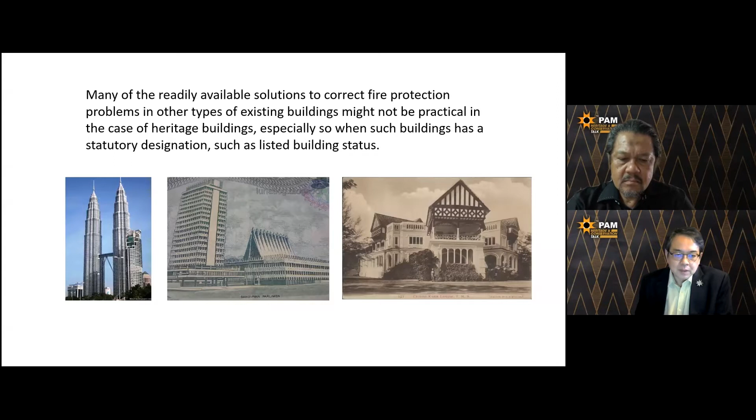As you are aware, as a heritage person who works in heritage buildings, you need to protect the integrity of the building, the originality of the building as to what it was at the time, as far as your documentation allows you to keep it or conserve it to that particular time. So by doing that, you are also preserving the materials of the building.

A lot of these buildings were constructed without codes at that time - very little, none at all, building codes, no consideration for fire safety at that time. In fact, Kuala Lumpur was wiped out, I think in the 1800s, at one time by fire, because buildings were very closely built and they were all timber. So that kind of hazard still prevails today, which I will show you in a while.

So the Gedung is primarily of brick wall, brick pier, and also timber trusses and all that, so it has a high potential for fire. So with the provision of hose reels, and again by having those active and passive systems - but what happened, will the building be burned?

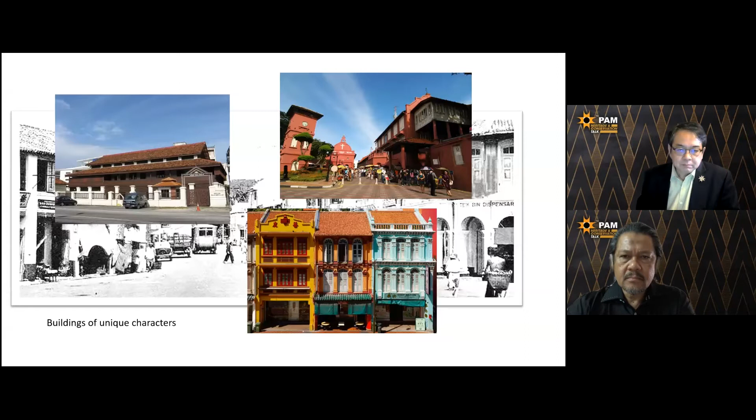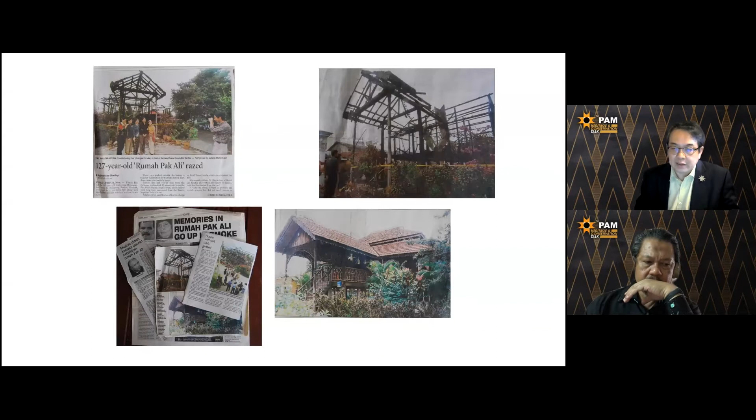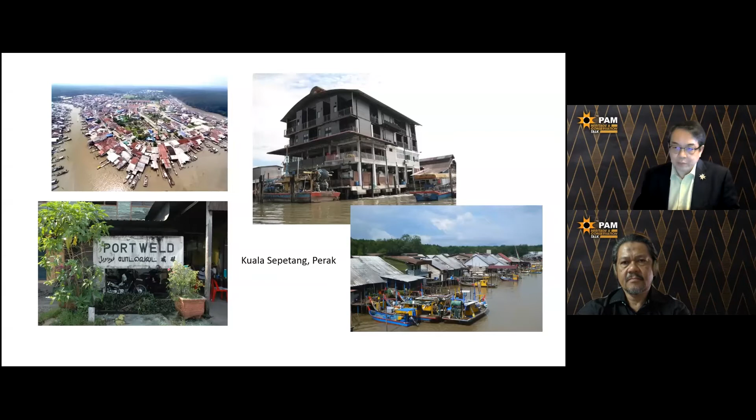So again, the question is, although you have provisions for this, who is going to fight the fire? Because you wait for the firemen to come and run along the small narrow lane, and you don't know where the fire is first. You need somebody to lead them to you.

The people, are they trained to use it? How to fight the fire? Do you contain the fire, or just pour water into it? Does it help? So technical know-how to fight fire must be taught to these people who stay there, and the crucial people. You must have an organization chart of who to call, who does what. So at least if there's any emergency fire, the right people will be able to fight it properly.

So if not, in 10 or 15 minutes, everything will be gone. If you're lucky, there's no life loss, but the whole village is gone, and there is no longer a village soon - diminished. So this traditional living style will also vanish in due time.

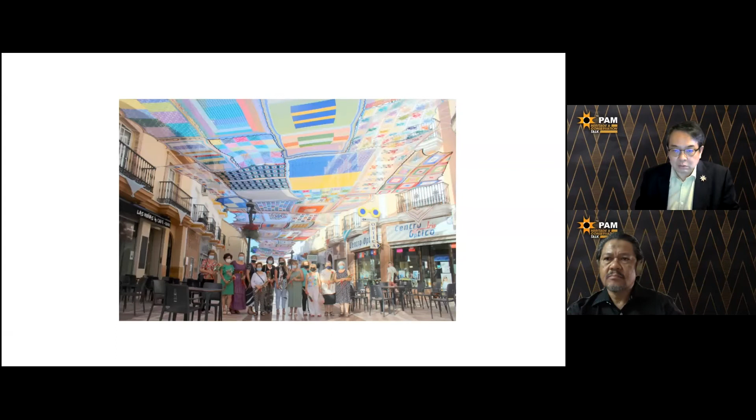But can you imagine doing this in one of the streets now I've shown you, with flames flying all over? The fabric is here, there, and all these highly combustible materials flying around. A lot of this decoration is temporary material, which is also very combustible and easily ignites.

So how are we going to address this thing? You want to show off that these are traditional, all good, but how do you contain the fire risk there? You have to consider all these things, what can burn and all this. So as a designer or developer of this area, you have to consider how to contain these things.

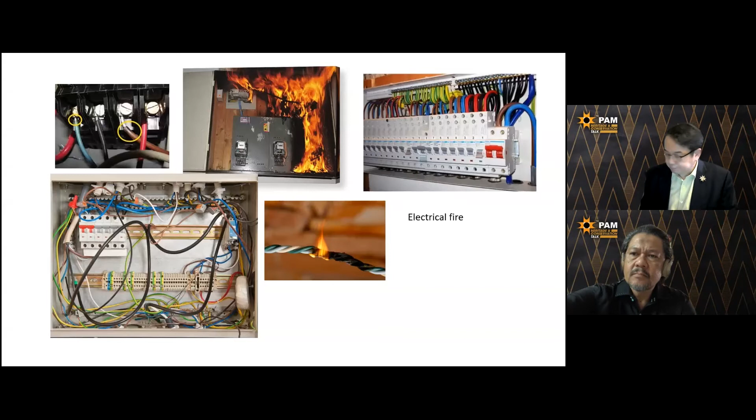So here again, people connecting things here and there, they just arbitrarily connect things. A lot of times they do not know. They just get a wireman to come in and do the connection, and sometimes they don't do a good connection. They use improper connections of bare wires and just use PVC tape to tape around it, thinking that it's good. But it's only as good as...

We don't know when the thing can trigger, the connection come loose and cause friction and sparks, and then heat build up because of this loose connection. So again, these are all hazards. You need to employ a competent electrician to do it, and also make sure that all your appliances are balanced. Now, most of the pictures I showed you are triggered off, more or less, electrical.

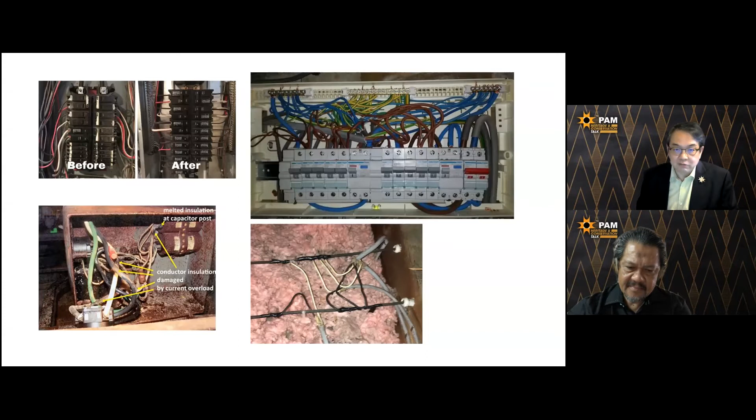So 1/3 of all accidental fires in restaurants are due to faulty electrical wiring and equipment or improper use of equipment. This is only for restaurants. What about residential and other heritage buildings? We need to take note of these things.

Even nowadays, I see that some of the big developments also allow 6 meters wide, but they forgot that they have super high buildings. So again, we have this problem.

And then when you start to use it, the owners or the person who runs it will then put heavy pots of plants and this and that, and it sort of blocks off the access to this emergency vehicle. And don't forget, every second counts. So you just block them off while the fire is ongoing. Every second you block them, the thing will just get worse.

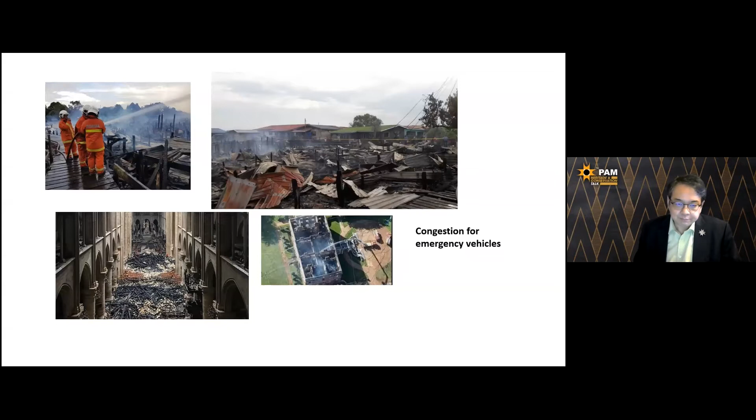Okay, this is a very famous fire, an icon in Paris, Notre Dame Cathedral, which was burned. The whole roof was gone, and now left the shell. And I think they have gone for a redesign competition, and they're going to redo it because it's so iconic. But the whole thing is that this building, the originality has now gone.

Only what you have is photograph. So this was apparently where the fire came from. I'm not sure, maybe Mr. Tay has the latest on this report. Mine was just after the fire that came out.

This is, you see, the person must be a competent person looking after it. Even if you have one of the best systems of firefighting or alarm, it's useless if the person is not competent to use it or know about the system.

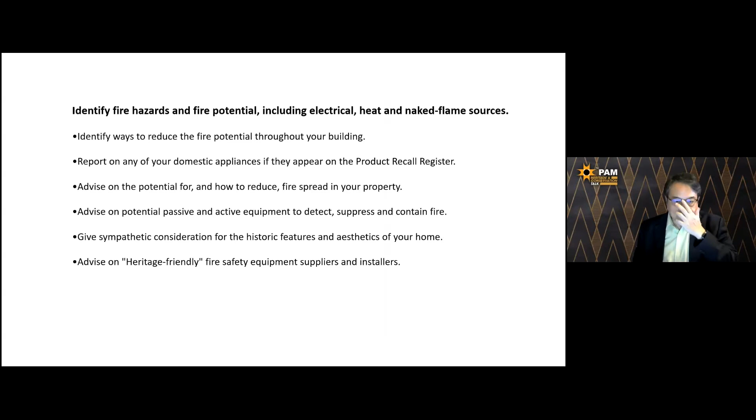That is sometimes not a good thing to do. So you identify the fire hazard and fire potential, including electrical, heat, naked flame source. So these are the few things you need to consider. Just very quickly, point, report on any of your domestic appliances that appear on the product recall.

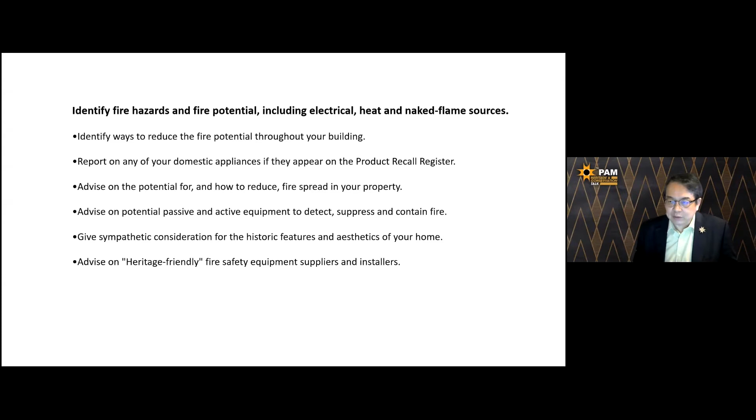So people must be there for management to make sure all these things are proper - the fire extinguishers are properly charged or recharged all the time, and making sure they're not expired. So advice on the escape plans in event of fire, how to escape, what to escape, make sure the passages are all clear. I've been to some places and I see that they end up as partial storage for these escape routes, staircases, corridors, and all that. So again, that poses a big danger on these things.

So let's go into the fire safety guidelines for heritage buildings. It was supposed to be launched in 2020 but because of MCO again, we had to postpone it. Hopefully by the end of this year we can get it moving again.

So the guidelines are divided into 5 parts. First is jurisdiction, law, and regulation for heritage building. Part 2 is classification, purpose group, and category of building. Part 3 is approaches in dealing with adaptive reuse of heritage building. Part 4 is fire safety and prevention. And part 5 is management and prevention.

So how does it go about now? These are the sources of power that we use for our guidelines. We have to follow this law, we cannot change it. So these are some examples.

Law of Malaysia, the Arahan, and the UBBL, and the National Heritage Act - these are the sources of power that we have to observe. We also have the federal government gazette on electrical under the EC, so we must follow that also.

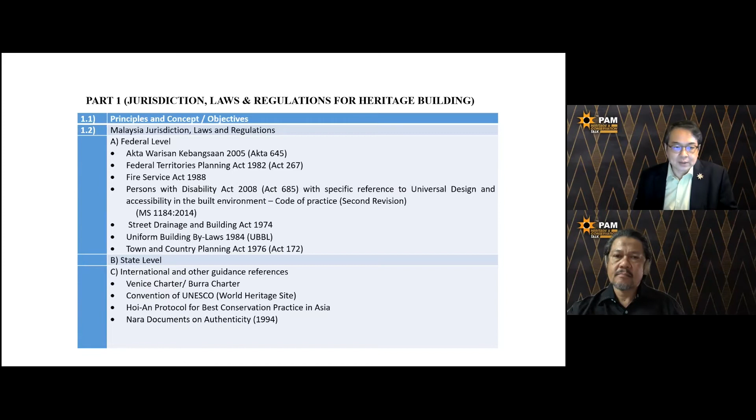So the main objectives of this fire safety and heritage guideline are: life safety first, to give sufficient time for occupants to get to safety; minimize damage or loss caused by fire; and if possible, preserve the original quality of the heritage building. That is the main purpose of this document.

So in the bylaw, we are looking at part 2, submission of plans for approval. In the end, I will show you why we need that. Then part 7 is fire requirement, and part 8 is fire alarm, fire detection, and all those things.

So in part 2, classification, purpose group, category - but this category purpose group is not necessarily in the uniform building bylaw schedule for this purpose group of building. No. So we have 2.2, we have this building appraisal of the material that is existing, and then purpose group.

Architect Stephen, sorry to interrupt. Yeah, we have 5 more minutes. Oh okay, thank you. Okay, alright, thanks, go ahead.

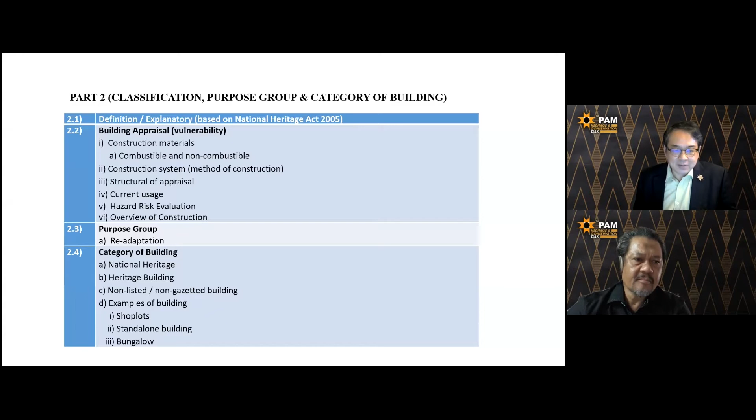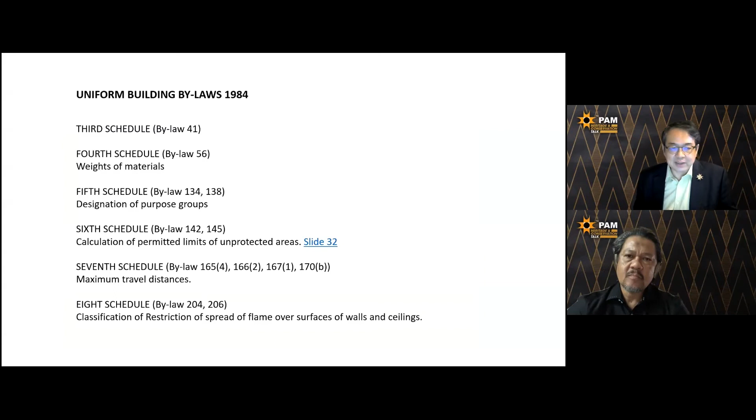Yeah, 2.4 is category of building, right? So the uniform bylaw third schedule also talks about that, and the fourth schedule, fifth schedule designation, and then sixth schedule calculation permitted - all these have to be observed. So you cannot just introduce a staircase somewhere in the old building just to satisfy UBBL. But then in UNESCO areas, sometimes this doesn't work - you introduce a staircase, then your building is already in breach of UNESCO requirements.

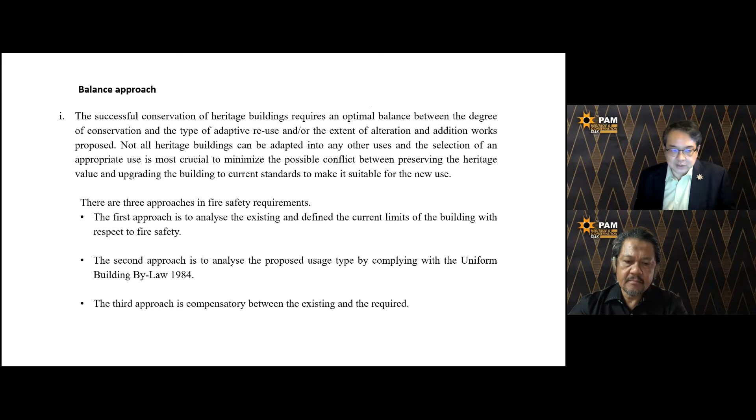So something short of a performance approach in a way. So all the things that are needed - a balanced approach. Successful conservation of a heritage building requires an optimal balance between the degree of conservation and type of adaptive reuse, and the extent of alteration and additional works proposed. Okay, then principle of accepting alternative design.

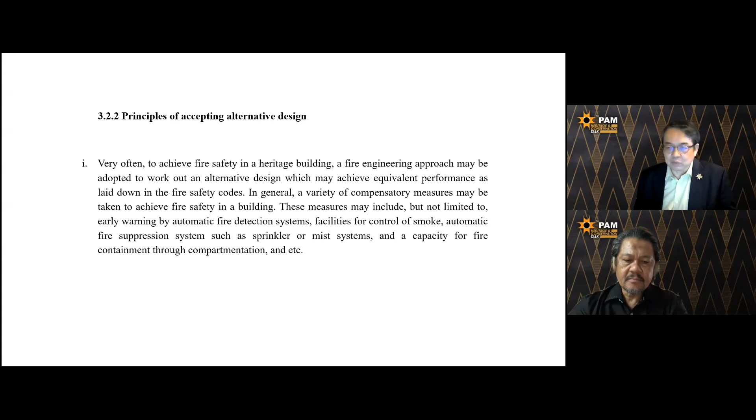Very often to achieve fire safety, a fire engineering approach may be adopted to work on alternative design. Mr. Tay will go into that much more in detail. Just that here I just tell you that we need to look into that.

So part 4 is fire safety and prevention. We have passive systems, and also performance-based, and also we are looking at an active system to help out also. So this one is more technical, and uniform bylaw again. So we have seen some very elaborate systems in Japan, but these are too expensive for us.

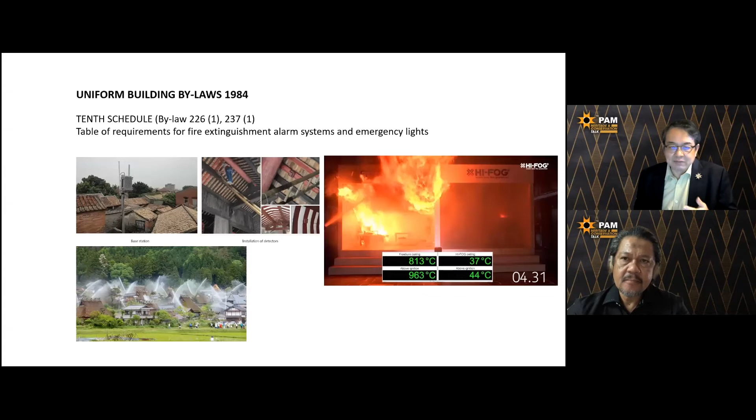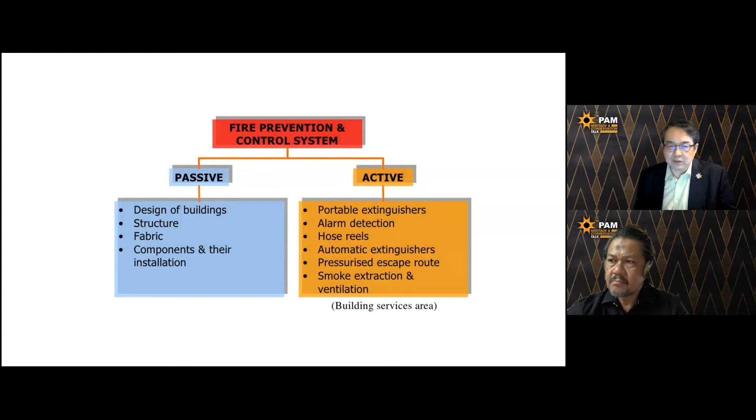So that we need to look at other places. Fire and all that, Mr. Tay will talk about it. So fire control system - the passive, active, design of building, portable extinguishers. So most of you are aware of the passive and active. So we use them a lot.

So the final part is the management operation. This is very important because this is after you have delivered the building, it is in use. This is where it's important to make sure the guidelines are being observed, and everything is just like the fire certificate in the newer buildings now, high rise and all that. So we also want to introduce this, so all those people comply.

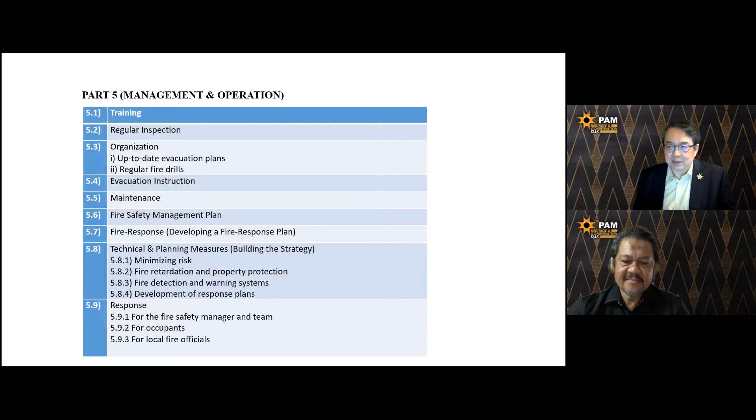So it's a license every year. There is an inspection every 2 years. That is still being considered by the committee on these things, so that the things are all in place. These are all checklists, daily checks, but these are all still in deliberation. Some may find that the daily check is a bit too tedious.

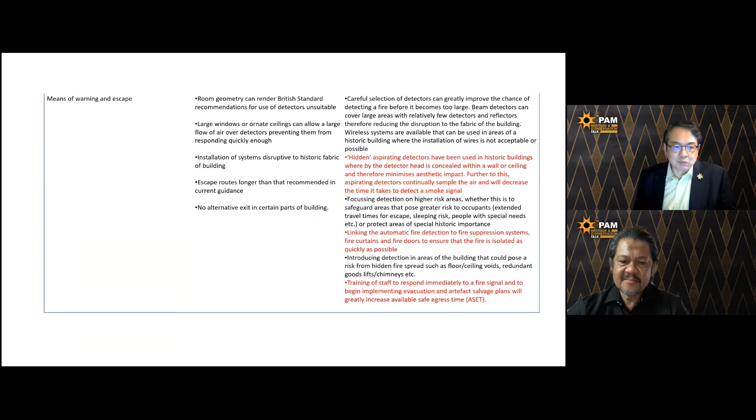So the organization chart - all these are checklists, simple samples, means of warning and escape, all those signages - all these have to be proper. So if you want to make sure that there is a follow-up, and not that the building after 3 years has nothing left, all changed, other users and all that.

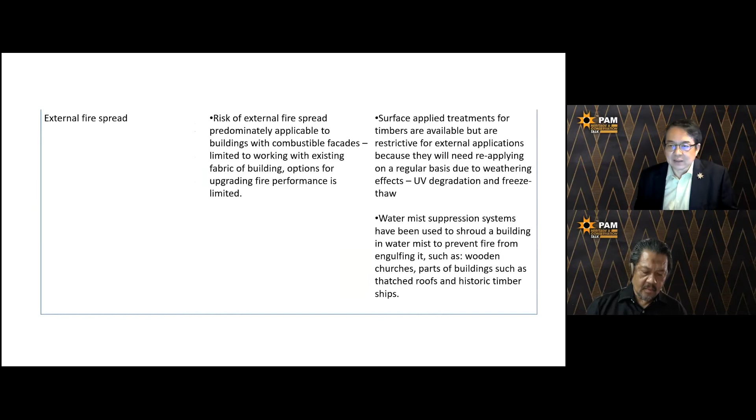So external fire spread - risk of external fire spread predominantly. So water mist, Mr. Tay will talk again on those things, pushing a lot of this. These are all fire protection, firefighting purposes. So access facility for fire brigade - make sure that they can reach, and how fast they can reach the place. Don't hinder them.

Okay, key points incorporated with fire safety management plans - measures identified during the prevention step are regularly revisited. That's what I was saying, to prevent fires from developing. Maintenance schedule to ensure protective measures put in place are still capable of performing as intended. These are all common sense things, but only common sense things, yet need to be followed up. Otherwise it becomes uncommon sense already.

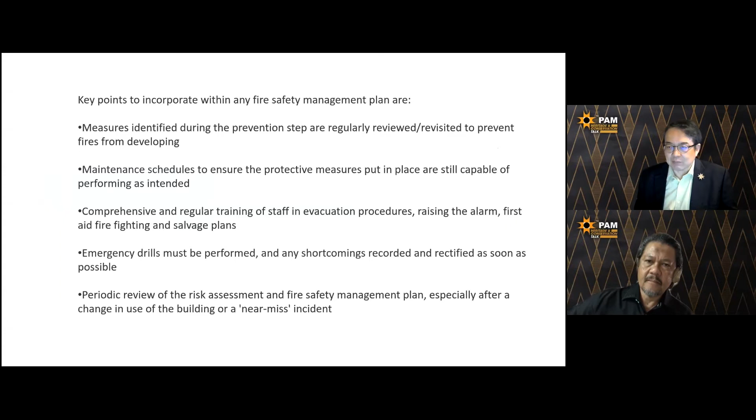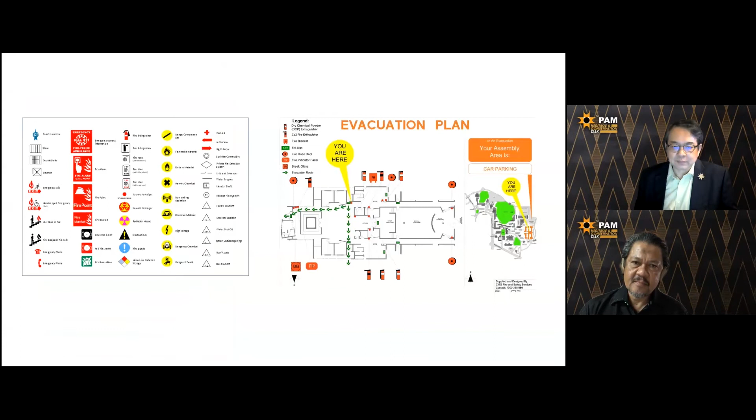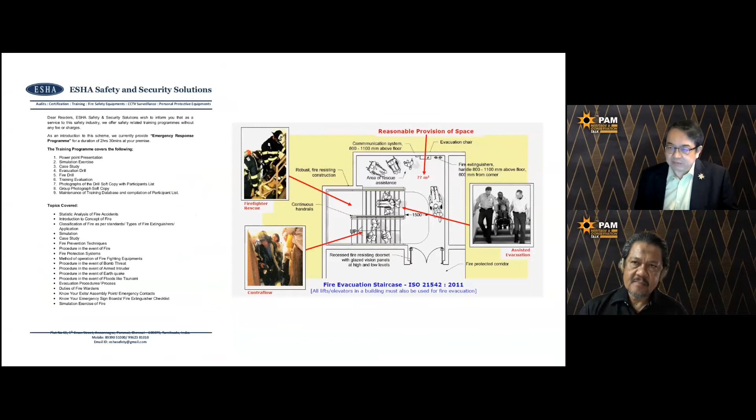So lastly, this word: stop erasing our history with fire. And with that, I say thank you very much. Back to you, Dato.

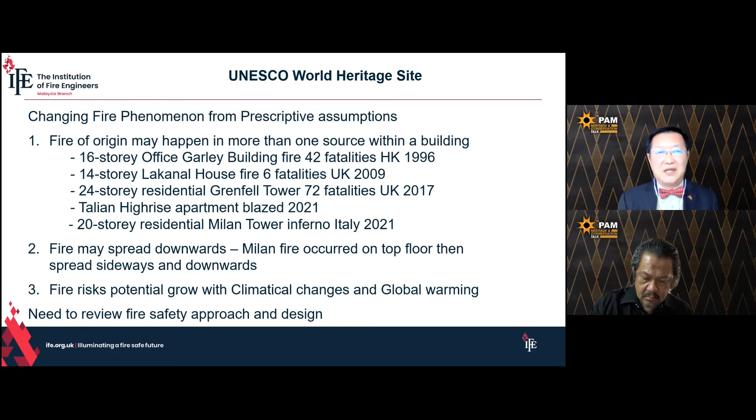Now, the other factor that increases fire risk is potential climate change and global warming. The scientists are now fighting tooth and nail with industrialists trying to cap the world's crust temperature increase within 2 degrees C, failing which will be catastrophic for mankind. So as the ambient temperature rises, we need to review the safety approach and design, because the likelihood of a fire has gone up multiple fold.

Grenfell Tower taught us so many lessons, especially as we have just entered the 20th anniversary of the 9/11 disaster, the Twin Towers of New York. And I can tell you, architects and engineers will definitely need to look at all these international fire incidents, and hopefully we can learn much more to apply to our current design, so that at least we improve the fire safety of buildings.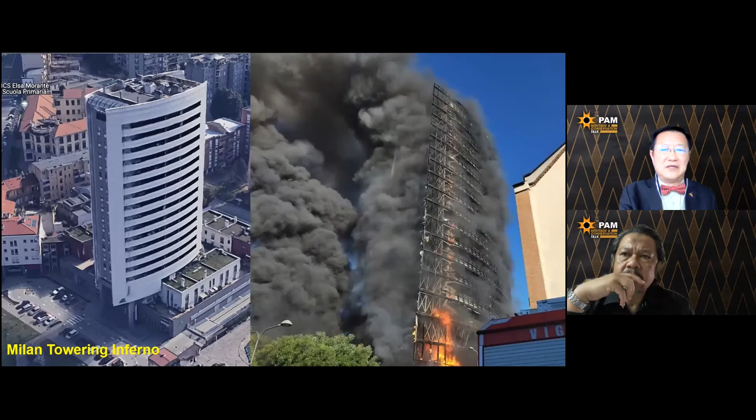This is a Milano fire, 20-story, and you can see it's a beautiful building, and yet when it starts to burn, it's scary. This is again an external cladding fire, and you can see that the cladding is all consumed. The interesting part is that the fire happened actually on the top floor, spread across and then downwards. This is never seen before. I've never seen any fire of this nature, and this actually opens up a new chapter whereby we've got to start looking at fire propagation fundamentals and principles.

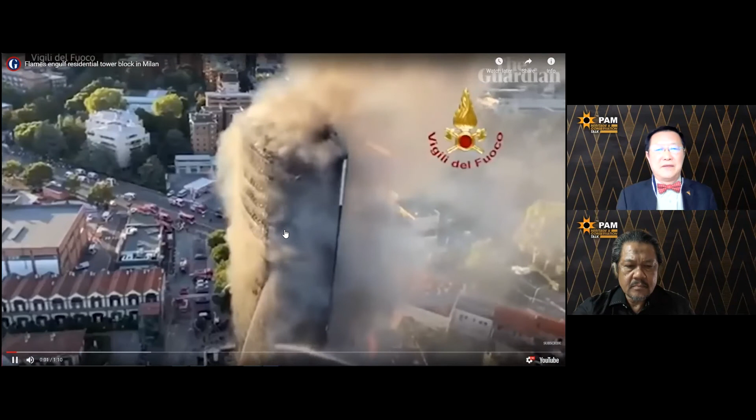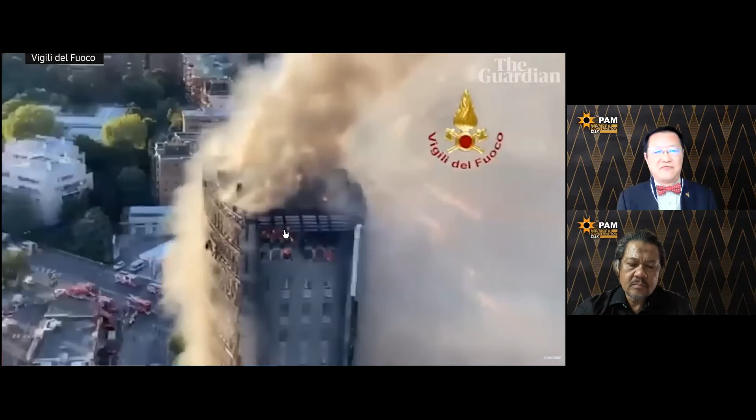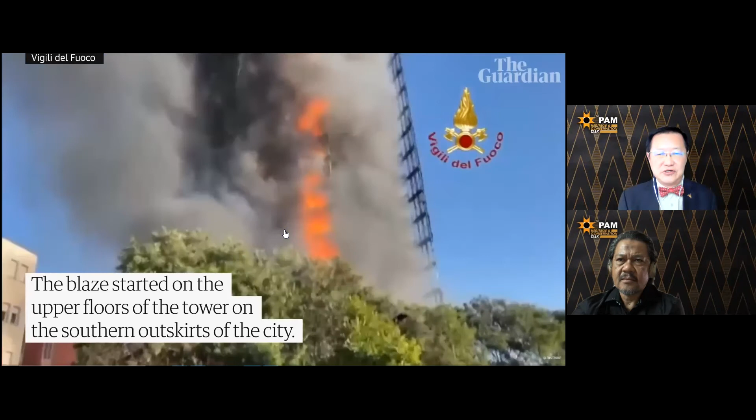It's a video of the Milano fire. Look at the fall off from the tower. Looks like a war zone. And this is the danger of a multi-story building fire, because all these are like missiles - they can kill, they can damage, they can spread fire onto the next building.

So with a fire, we are not only looking at the building on fire, but also what is the impact on the surrounding areas. If you look at the 9/11 incident, there are not less than 7 buildings that were totally damaged around it.

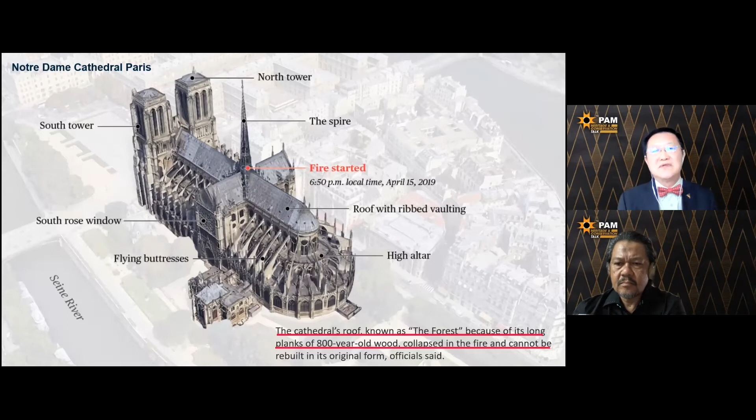The fire started actually during a renovation exercise, on the roof, just in the middle of the spire. Look at the timing, it started at 6:50. You can see the timing is very, very fast for the fire to spread. This roof, lengthwise, is about 330 feet. Fire spread because inside is hollow, and the whole roof is made of wood, so the fire spread up very, very fast.

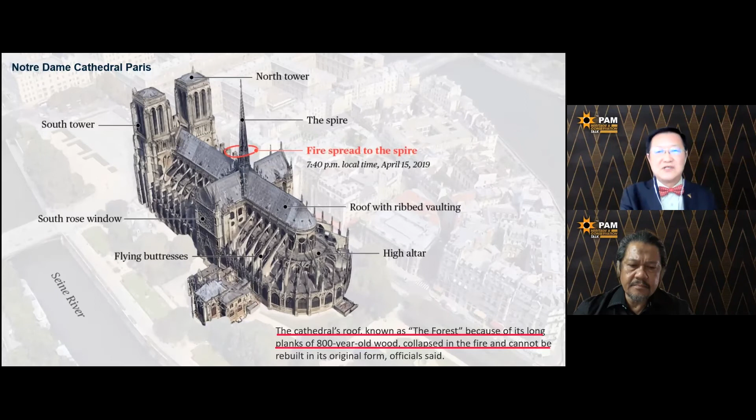7:53, the spire collapsed. The roof also collapsed at 8:07. So from about 7 o'clock to 8 o'clock, it only took 1 hour to consume the entire roof, a few hundred years old, made fully of timber.

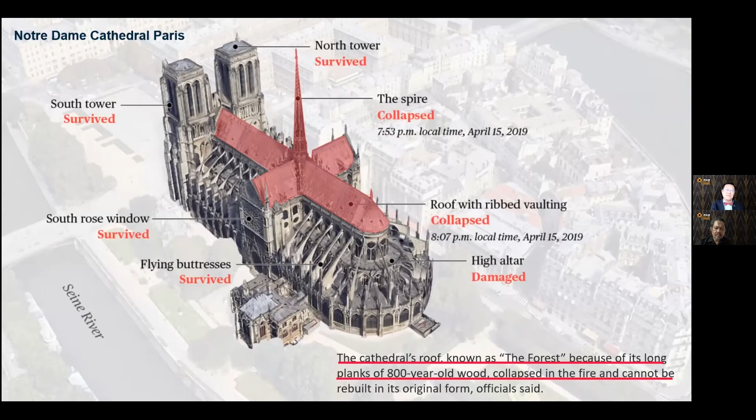It's actually beautiful, and it's going to take a lot of money to actually build a replica of the roof.

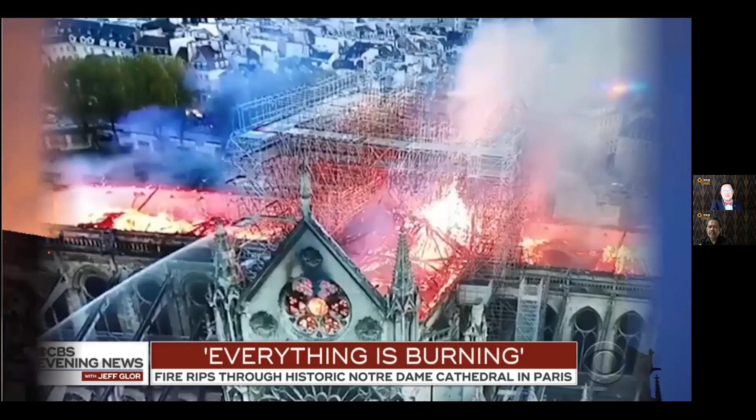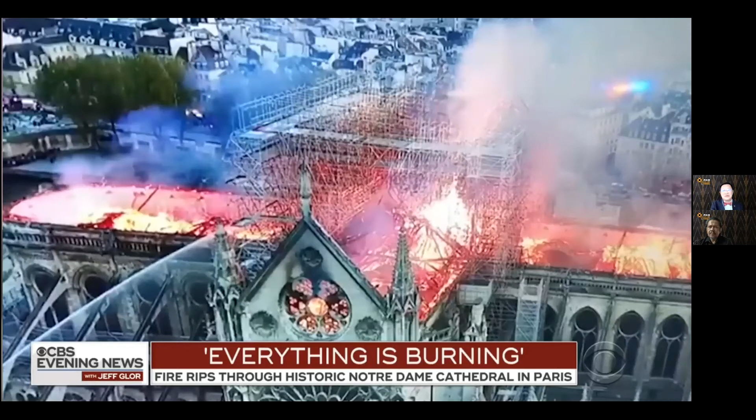I'll just show you how the fire starts. The spire is already gone, collapsed. The roof also collapsed. Luckily, the majority of the cathedral is made of stone, and so it actually withstood the ferocity of the fire, except the roof.

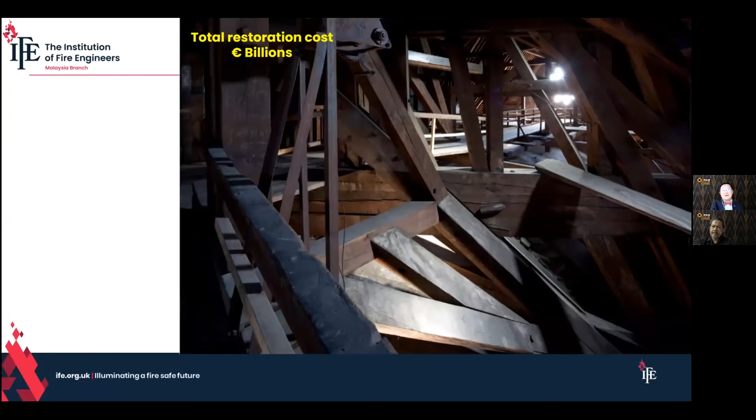And they call this forest, the roof. The French used to call it a forest because it's made of 800 years old timber. The entire roof is made of timber beams, structures, truss, and all that. And yet, they're all gone now.

Now, can you replace it? Of course, the answer is no. It's because how can you go and look for an 800-year-old tree to come and build the roof? And the craftsmen are also gone. Do you know how much it takes to actually refurbish it?

Next, let's look at how effective firefighting was. When the fire authorities were called, they came with their turntable ladder, because the roof is at a height from the ground level. So a jet was actually used to introduce water into the roof, while another one is actually trying to cool off the surface of the building below.

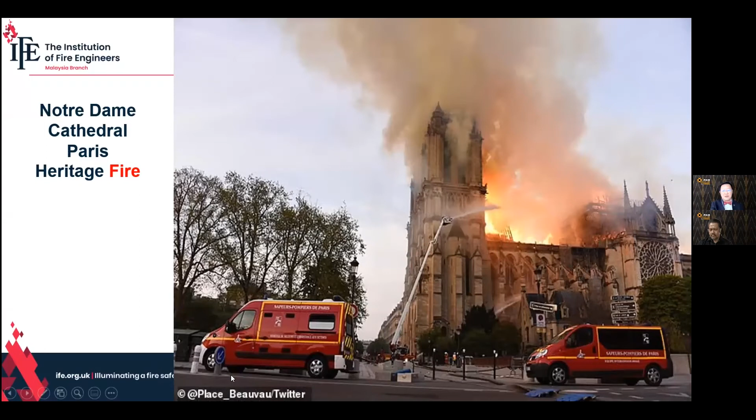Now, if all of us always assume that when you have a jet, you can actually put out the fire, is that true? Look at the photo. Because of the wind shear factor, most of the water was blown away.

I just read the latest computer simulation of 6 different types of water jet that come out of a nozzle. They tell you that 30% actually evaporated because of the hot air plume, the convection current coming out of the fire. Another probably 20-25% will fall to the ground because the water droplet size coming out of the water hose is actually quite coarse, about 1 to 2 millimeter diameter. And because there's gravity, as they travel through the distance, they fall to the ground. So very little actually reaches the source of the fire, provided your pressure and flow rate is actually correct.

This is another close-up shot, and you can see that the water never reached the fire source. So we should not fall into the pretense that as long as we provide the active fire protection system, it's going to help, because there are a lot of factors never factored in during the design stage. We need a lot more research, with the data presented, to actually formulate proper fire safety design.

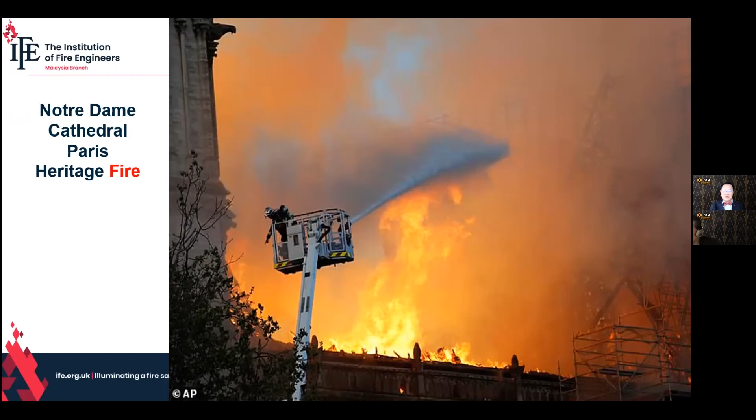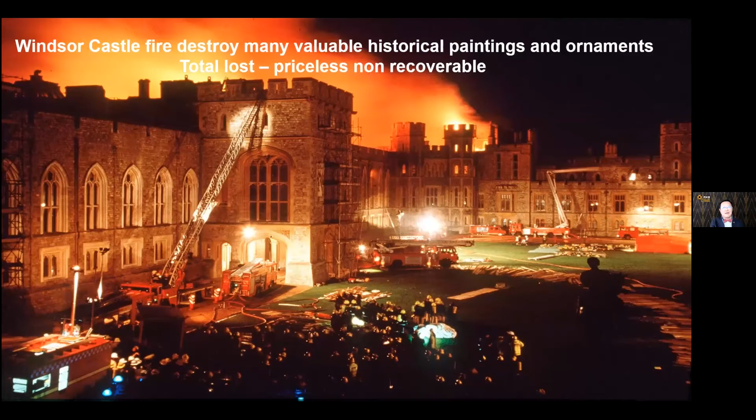But for this particular fire, even though they could restore the building, unfortunately, all the paintings on the wall, ornaments, all the crystal light fittings, and all that is gone forever. They've lost a lot of heritage, definitely.

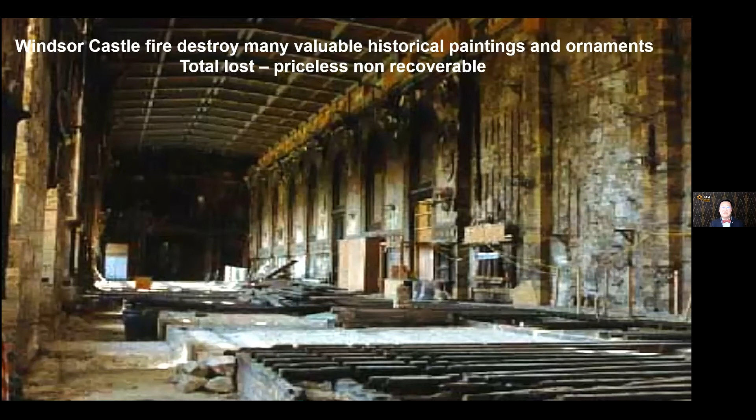Now, what is the crucial objective of preservation of a heritage building?

Of course, we have to look at developing guidance and preventive measures to avoid a fire. You cannot expect a fire to happen and hope for the best, because on top of fire damage, the amount of water coming from the active fire protection system probably ends up doing more damage than the fire itself. And all this is not recoverable.

So to me, heritage buildings should look at a zero fire fundamental. How are you going to achieve that? All the stakeholders will have to sit around and really study and plan it carefully, because once it's destroyed by fire, they lose their cultural, historical value. Even if restored, it's just a replica. They lose the heritage status.

So what can we learn from all these fire incidents? Non-combustible building materials always survive fire incidents. It's the combustibles that perish. And so we really have to expect the unexpected with fire risk assessment.

Now, fire risk assessment is not about checking against UBBL. That is fire auditing for code compliance. Fire risk assessment is a different ball game, a level up, whereby you really have to look at identifying and analyzing what is fire risk, what are the fire hazards, and how do you mitigate them.

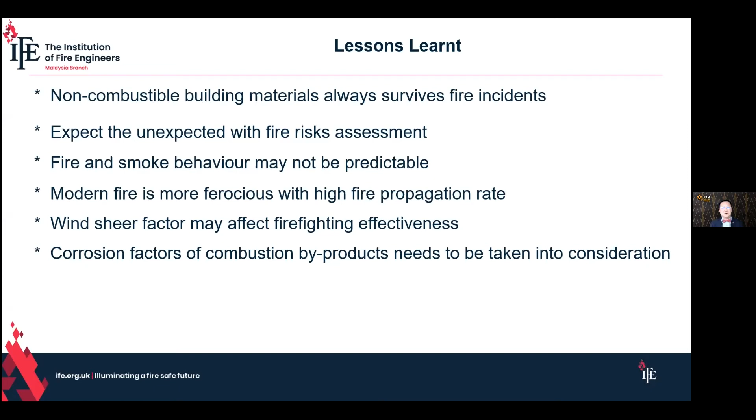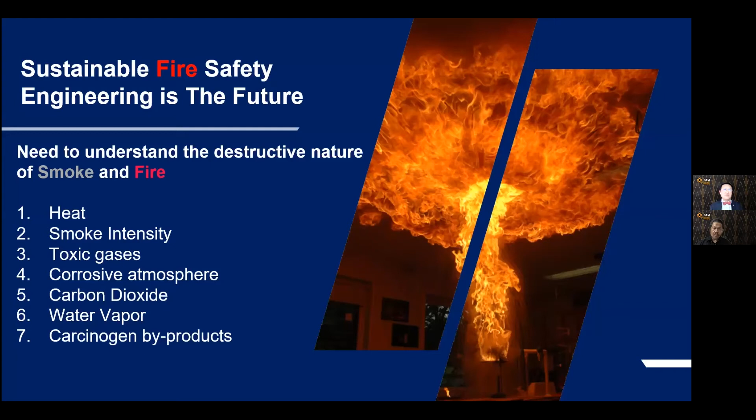So what are the fire risks we're looking at? If you really want to conserve or preserve a heritage building, you need to understand the destructive nature of smoke and fire, because fire generates heat, smoke intensity, toxic gases, corrosive atmosphere. They also produce carbon dioxide, water vapor, and carcinogen byproducts for occupants.

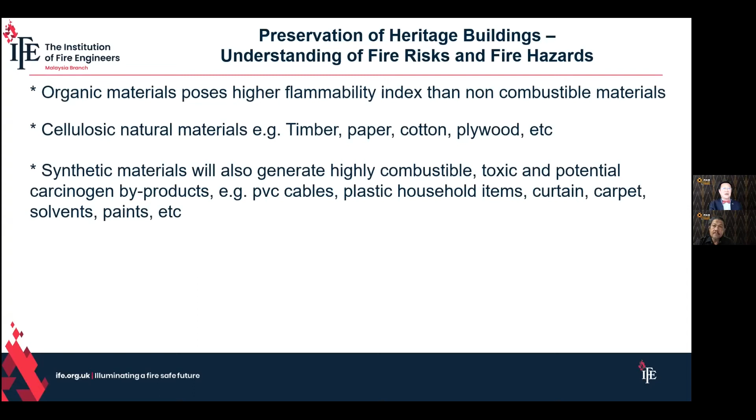Organic materials possess a higher flammable index than non-combustible materials. Cellulosic natural materials like timber, paper, cotton, plywood, linens, they all burn. Synthetic materials also generate higher combustible, toxic, and potential carcinogen byproducts like PVC cables and plastic household items.

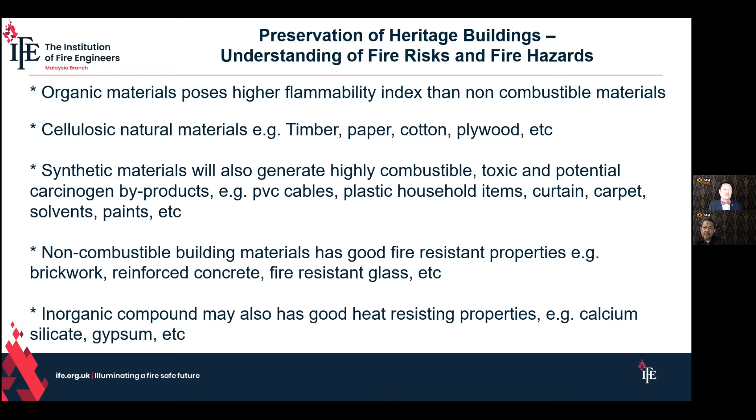So non-combustible building materials normally have good fire resistant properties. Or you can also use inorganic compounds like calcium silicate and gypsum.

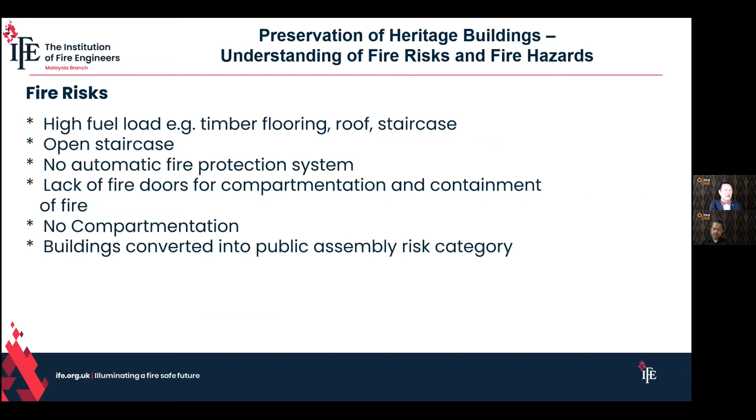What are the fire risks? High fuel load, timber flooring, roof staircases, like what architect Stephen pointed out, open staircases, no automatic fire protection system, lack of fire door compartmentation, no compartmentation for walls, buildings converted into public assembly risk category or sleeping risk category, design, what they call signature hotels.

A lot of these are converted for backpackers, which means you've got a lot of people coming in. Some of them might cook in the room with a gas cooker, which increases fire risk. Streets were narrow and lacking in hydrant facilities.

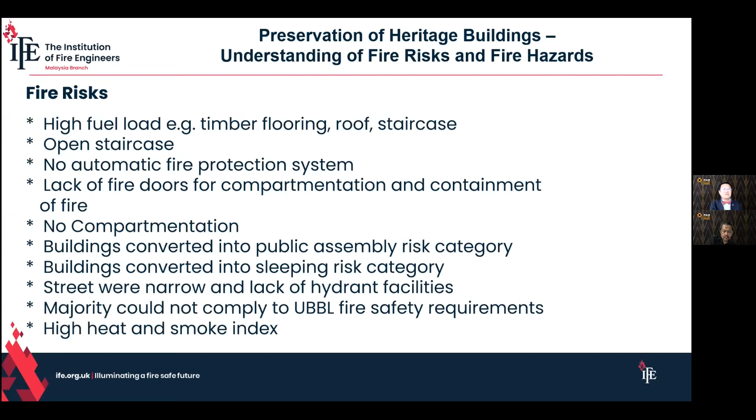The majority could not comply with UBBL fire requirements. High heat and smoke index. Multiple ignition sources, aging electrical wiring, induced short circuiting, no fire safety requirement for residential heritage buildings. A lot of these are built 100 years ago, and there's no requirement because UBBL was only enacted back in 1984.

It's difficult to retrofit a heritage building with modern fire protection systems due to load bearing issues and space. Fire propagation is fast and furious because there are a lot of timber elements. It takes longer to extinguish a fire because of all the restrictions. Water and steam effect may cause unrepairable damage.

Talking about taking longer time, the fire rescue department already declared that they can no longer respond within the standard international norm of 7 minutes. That's why all designated buildings are asked to upkeep their fire protection systems under fire services regulation. The structure is fragile to heat and water attack. Interior decoration may sustain permanent smoke and corrosive damage.

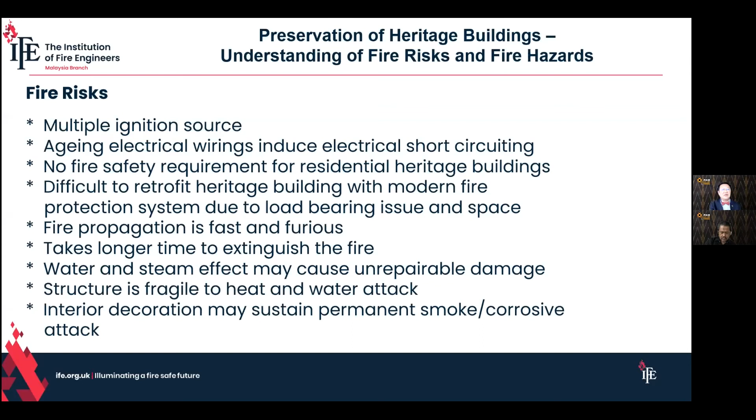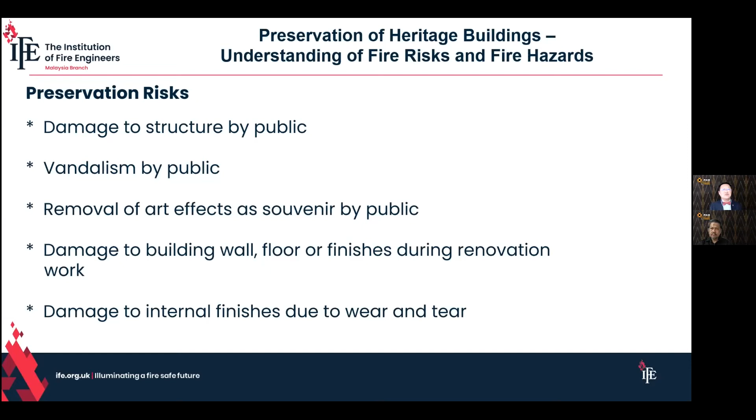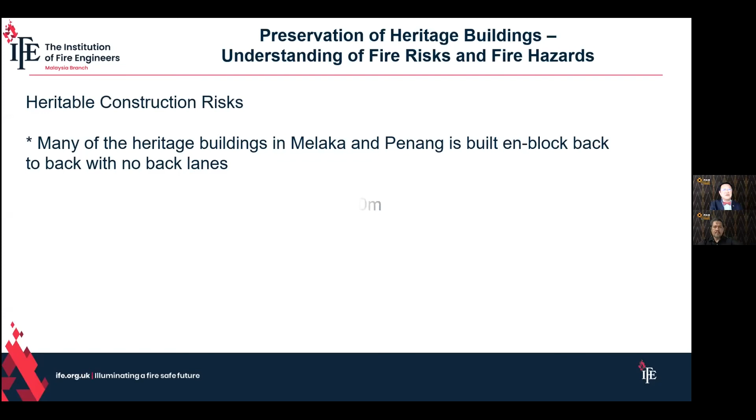Residential buildings have a depth of up to 60 meters. That is pretty long, far exceeding the maximum travel distance. And buildings were constructed with timber flooring and a single timber staircase.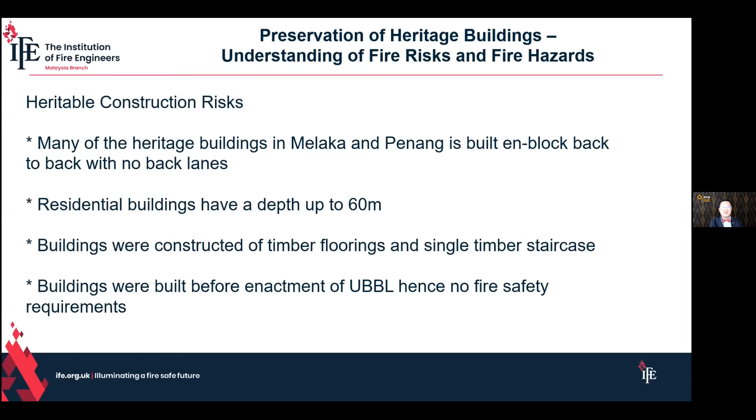We've already had quite a number of fire incidents in Chinatown in Kuala Lumpur with casualty rates, because once a timber staircase is burned, there's no escape. Buildings were built before enactment of UBBL, hence no fire safety requirements.

Okay, let's look at the restrictions and constrictions of the heritage building. The issue of invasive retrofitting of modern fire protection systems into heritage buildings. The structure is not strong enough to take the mass of active fire protection.

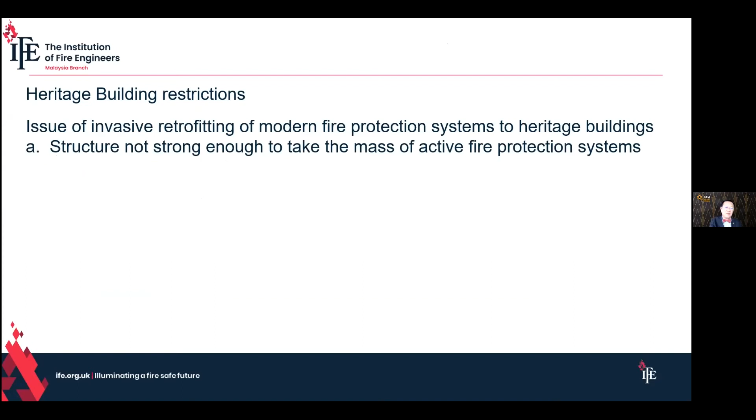For example, water storage tanks, pipe work, space limitation for new fire protection systems, pump house, clean agent cylinders, insufficient power supply facility to cater for heavy fire protection systems like pump sets and fire alarm panels. Modern fire systems do not blend in with heritage style, and this is one headache.

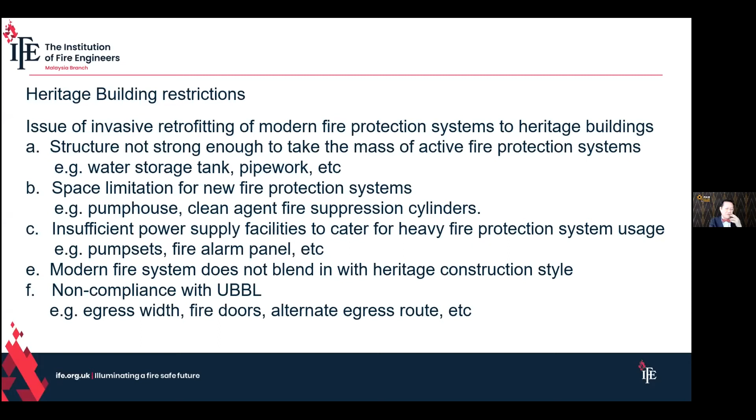Non-compliance with UBBL regarding egress, fire doors, and alternate egress routes. So what are the alternate solutions and mitigation measures that we can actually look at?

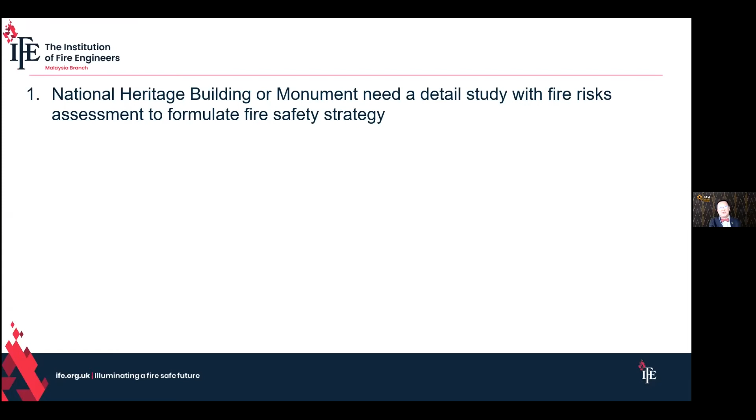Perhaps we should look at a national heritage building or monument detailed study with fire risk assessment to formulate fire safety strategy. A guideline, I think, is only a beginning, but we should look at more detail. It should be separated, to look at national heritage buildings or monuments against the more common general category of heritage buildings, like residential and so on.

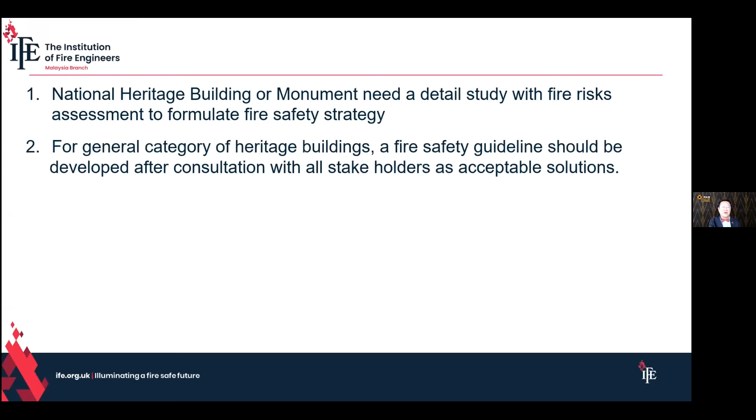This, I believe, is already being done and is to be published by PEM. So let's wait for it to be published.

A middle-of-the-road solution may be necessary in resolving some technical and legislative issues for current projects, because if you change the occupancy risk of a residential into a sleeping risk or public assembly risk, then the fire rescue department will request that you comply with the requirements of UBBL. But if you look at heritage buildings, they have their own rulings whereby a lot of things you cannot do. So instead of getting stuck because of restrictions imposed from both sides, maybe PEM can start looking at middle-of-the-road solutions so that these projects can be approved smoothly. But anyhow you look at it, I understand the importance of heritage buildings, but I think life safety should always be the priority, especially those with sleeping risks.

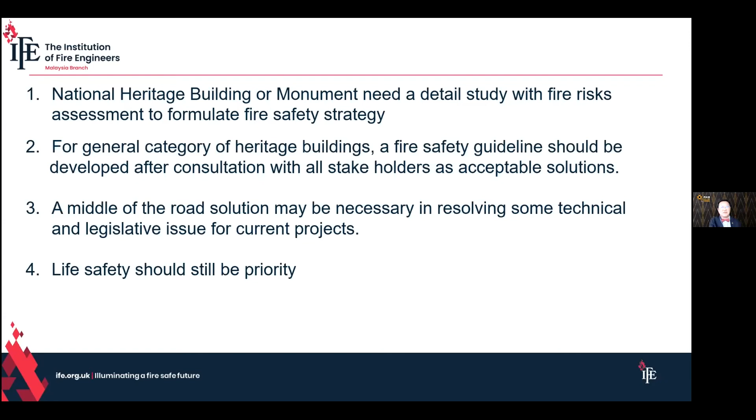Now, I believe that a lot of these buildings, if you convert them into public assembly buildings or hotels, it is a requirement to have an alternate fire escape route.

It's unthinkable to add a proper fire escape staircase into a heritage building of limited space. If you look at pre-war buildings, we used to use spiral staircases at the back, including my current office. I have one spiral staircase, even though it's 3-story. The only difference is mine is not a steel spiral staircase, it's actually concrete, which I think is not that expensive, and it also saves a lot of space, because what you want is for people to be able to escape or egress safely.

If you wanted to go back to just complying with the requirement of proper fire staircases, risers and tread ratios, whatever, I think it's going to be very difficult. So I think we should start looking at alternate measures, and as long as it fulfills the objective, why not?

A lot of fire doors can't be changed, because I'm also involved in the heritage group of IFE in the UK. They have a special interest group, and I've been sent a lot of information from there. In the UK, it's so strict — if you are looking at preservation of a heritage building, and you come across a door that's, let's say, 400-500 years old, even though it's already damaged and needs repair or replacement, you just cannot change it to a modern fire door.

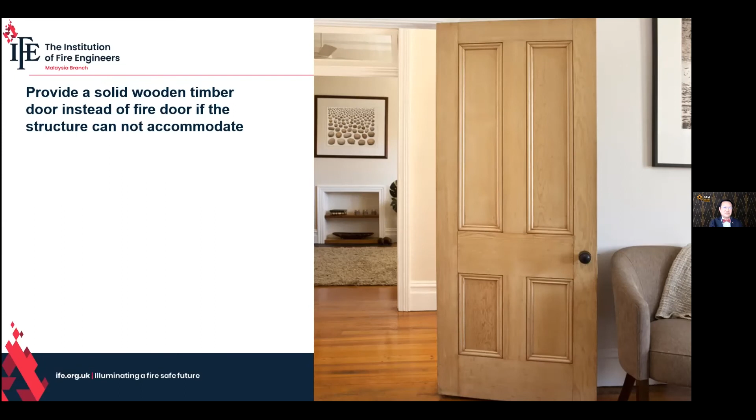If you have a lot of timber flooring, which is a threat, including timber staircases, perhaps a fire resistant ceiling is one of the answers. Make sure you have a ceiling that can absorb heat, so that the heat will not be propagated should a fire happen.

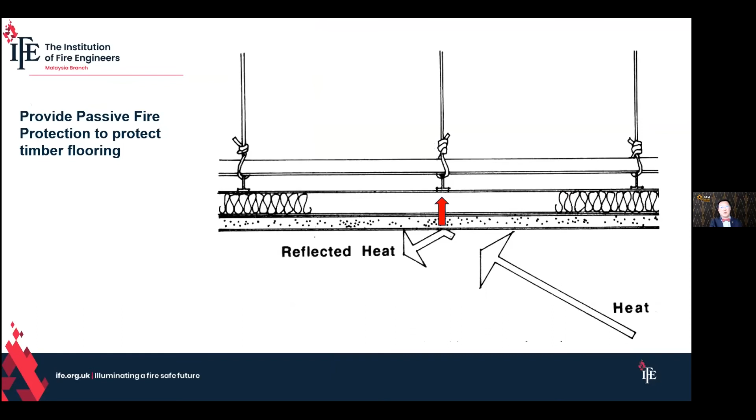You need to definitely provide emergency lighting for egress, for life safety, including exit signs. There are many ways to do it. Take a look at Japan, Korea, and now most international airports around the world — you'll find a lot of this is now being concealed on the floor, so it's not intrusive. You do not have to mount it on top of a door, you can actually do it on the skirting or on the floor.

I've always mentioned, what is the point of putting an exit sign or a close sign on top of a fire door, when during a fire, the smoke accumulates on the ceiling and flows towards the exit, and all the close signs get covered up? Why do we keep putting close signs on top of fire doors where you cannot see them, instead of on the floor during a fire?

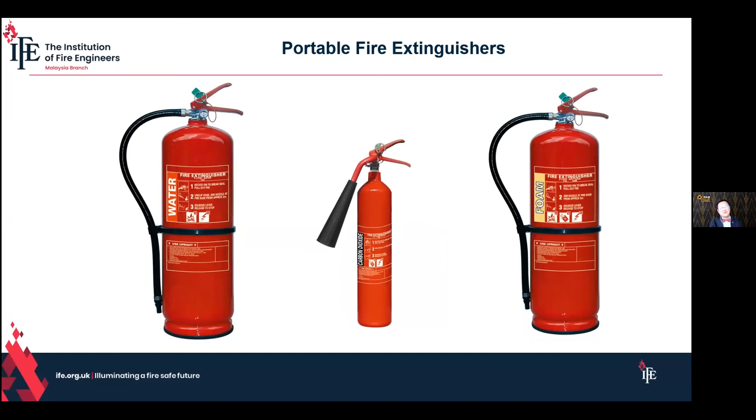A fire extinguisher is definitely something you need to have. They can actually probably be concealed in a cabinet so that it's not so intrusive.

Hopefully we can then work towards conserving or preserving heritage buildings in the world. I know PAM has really put in a lot of effort, including the rest of the agencies in Malaysia. Hopefully IFE can also contribute as one of the stakeholders, and hopefully we can then make all the heritage buildings safer. Thank you.